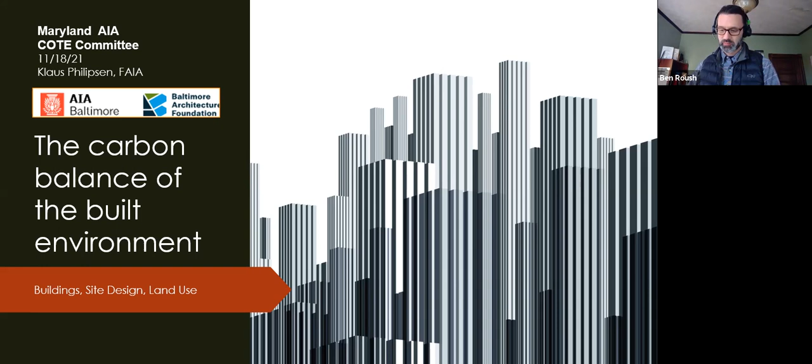Good morning. Congratulations on starting your day with decarbonizing the built environment. It's the topic that's always on your mind right after breakfast, I'm sure. Obviously we are motivated with the Glasgow conference and this being in the news every day. So if the COTE committee doesn't have their mind always on this, they sure do now.

As Ben said, this presentation is a modification of what I presented to the Maryland Climate Commission, which was a fairly ballsy thing that I took the invitation from them to present to, because that's a really high caliber group of experts, and I'm not. So anyway, you will see what I told them.

As you know, the discussion about sustainable built environment has been slightly moving from just a focus on energy to a broader lens about the carbon footprint. This shift in focus is what I try to tell the Commission about.

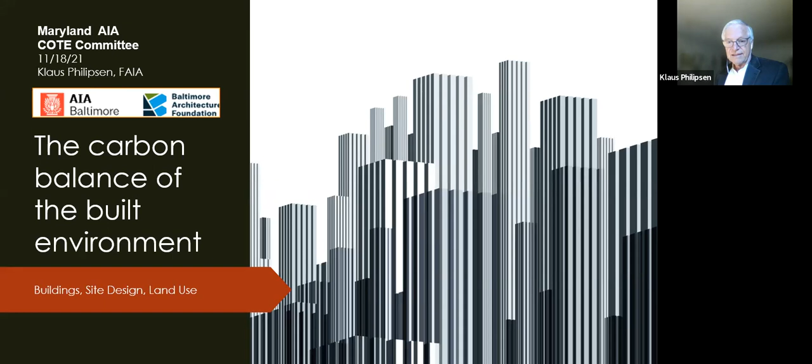So we are now talking also about embodied carbon in materials, all the way from production to recycling of the building at the end of life. We talk about non-fossil fuels in the context of energy efficiency not being so much an issue anymore if you had really renewable fuels. And land use and site design, which are always two aspects that are dear to my heart, but they are not necessarily on everybody's radar when we are talking about sustainability.

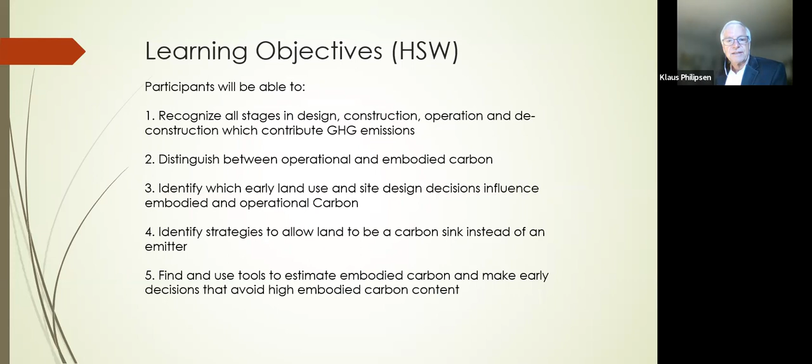So the learning objectives are these. I don't need to read them out, but we will talk about operational and embodied carbon and that distinction that I just mentioned already.

And myself, I am not an expert or specialist in sustainability necessarily, but I have always made sustainability the center of my activities. So this more holistic sustainability perspective, in the 46 years—and Ben alluded to the long duration of my practice—46 years intersecting buildings, urban design, and planning. And that has also led me to a lot of work in the nonprofit sector and in civic engagement.

And so in the holistic view of sustainability, all these things intersect. And I always thought that the best building isn't worth much if it isn't responsive to the context. And in sustainability, we talk more and more about systems, and buildings are part of systems.

And applied to decarbonization, this means the greenest building doesn't count for much if it was created by ransacking the land around it, or if it doesn't have equitable access, or was created with a huge carbon footprint in the construction, or it is so expensive that it can't scale.

That would be sort of like an all-electric Porsche, or this morning in the paper, there is Biden in an all-electric Hummer that has 650 horsepower and a sticker price of $160,000. Its contribution to carbon reduction wouldn't be good because too much energy was spent to build it, too much embodied carbon in it, and it's too expensive to scale.

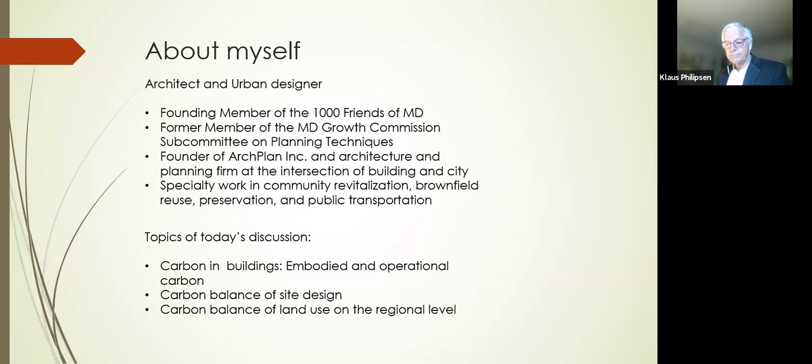As I said, the COP conference put this all into perspective again last week, or the last two weeks, and those of you who followed it could see that the urgency is beyond doubt, but the implementation and the activities, that is the rub.

Let's just, I'd like to talk about community. My blogs are called Community Architects.

So there was a calculation done by ICLEI to calculate what regional local governments would have to do to make their communities so carbon reduced that they would meet the 1.5 degrees Celsius target. By 2030, which is in 9 years, the average community globally needs to reduce emissions by 63%. So on the community level, that's the all-encompassing part of buildings, sites, and land use.

And as you all know, buildings are responsible for 40% of greenhouse gas emissions. They are also 14% of water consumption. And as I read it, 60% of the global waste. That is just a stunning number.

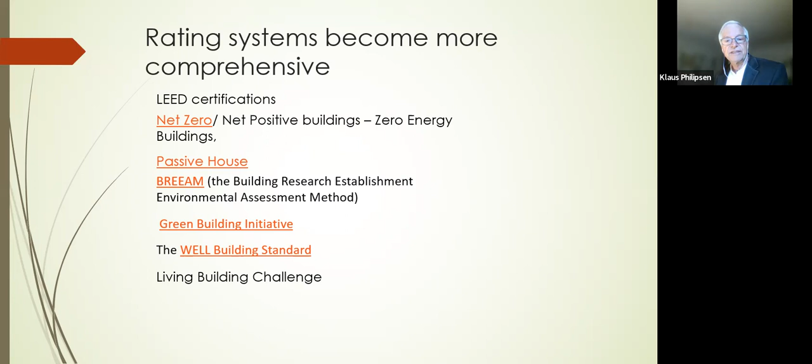Today, the emphasis is on that, which is what I told the Climate Commission, because they had not really done that to date, and their policy recommendations to the state and the legislative period next year are all about operational carbon. So I thought it would be good to speak about embodied carbon as well, because that needs to be also a policy in the state of Maryland.

And so once again, in operation, energy and carbon is kind of a proxy, as long as energy is not renewable. But once you would have all renewable energy, you could kind of relinquish a little bit on the frugality of energy, because then it wouldn't matter as much. If everything is solar, then it wouldn't matter as much whether you're that frugal with the energy.

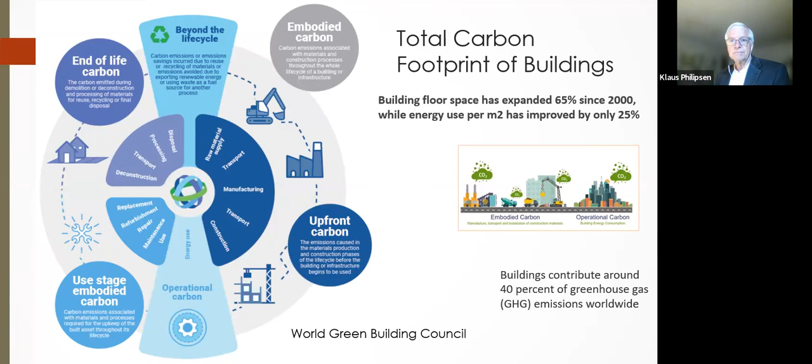But no, what is going on? Get this moving again.

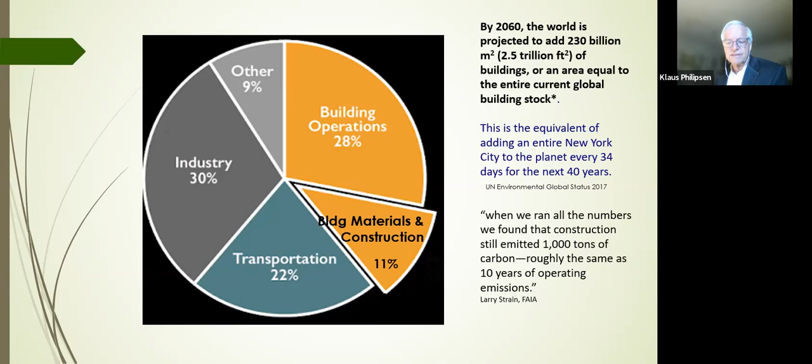The relationship between operations and embodied carbon starts to shift if you put into perspective how much gets built. There's an estimate that in the next 40 years, the footprint of all buildings in the world will double. That is just a staggering thing.

The more that accelerates, that we build so much—not necessarily all in the United States, it's in China and India, wherever—then you get a completely different relationship between embodied carbon and operational carbon. You see that the embodied carbon relationship could be almost equal to that of operational carbon.

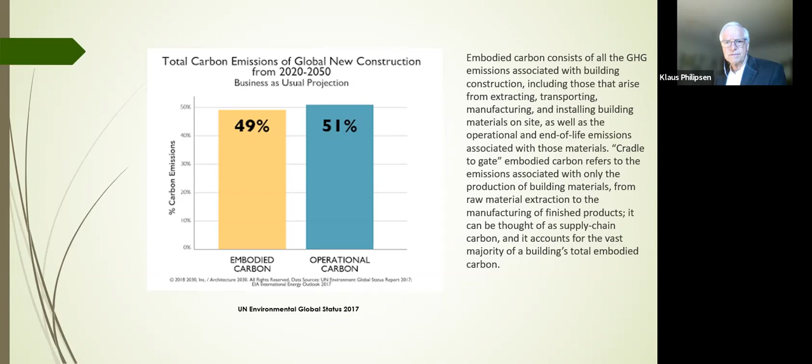There are, of course, a lot of variables in that. One of them is how energy efficient the buildings themselves are. And then one can look at various graphs in a lot of ways.

So here, the embodied carbon chart on the right shows the chief culprits in terms of materials. Three materials—concrete, steel, and aluminum—cause 23% of the carbon emissions. That's the red segment there in the pie chart.

The left chart looks at it in another way, showing building components. The right one is about materials, and the left one is about building components. Core and shell make up about 11% of that CO2, and industry and making the other stuff is 32%.

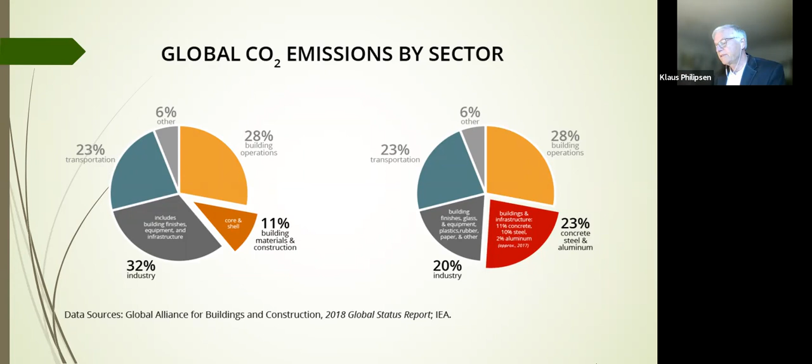So then the buzzword is the life cycle assessment, LCA, which goes from the material extraction all the way to the use and the construction, the use, and then the end of life when things get demolished again or, in other ways, reused, hopefully.

Architects, of course, control only a portion of these steps, namely which materials they select. But also sometimes some of us get involved in land use planning, and some—many of us—in site design. So we'll talk about those two items in the full life cycle assessment that happen before the building gets built.

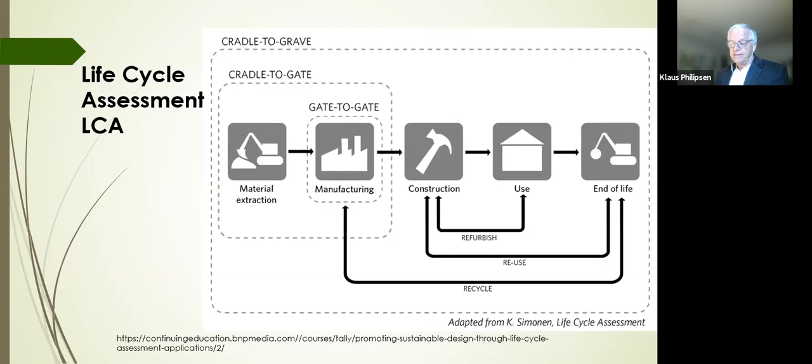So, land use. Land is the scarcest resource on earth. This makes land development one of the fundamental components in effective, sustainable building practice.

Site design is usually managed by the owner, developer, or contractor, while land use overall is regulated by the local jurisdiction. So depending on with whom we interact and who our client is, we will either deal with just site design or with land use in a broader sense. But the carbon reduction principles would stand in both cases.

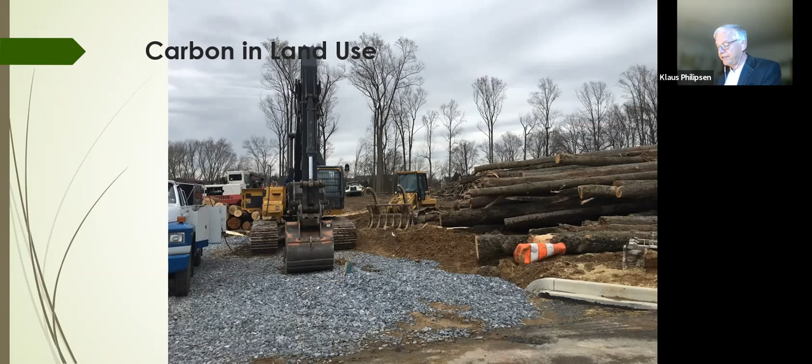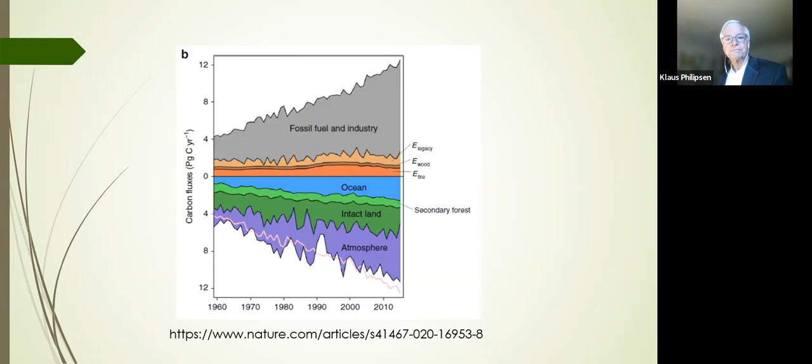But we're talking about the green portion here, which is the land part. The land part is gauged every year for what the land absorption effectiveness is. And then, of course, land is also an emitter. So we have this dual function, that land is an emitter and a sequester of carbon. In the natural state, it is sequestering carbon, and in the man-made state, it could be an emitter.

The cumulative effect of the balance of these is really an emerging science. Just in Glasgow, the forest discussion tried to see what forests do and whether they reduce or increase by country. The United States actually improved their forest cover, and the numbers for the US were changed in the last minute.

So it just shows that this is not so easy to get answers on. But we know that in spite of widespread smart growth policies, the US is very bad at land use, using a lot more land for development than Europe. I'd say land use, not living standard, is the major driver for the fact that US carbon footprint per person is about twice that of European countries.

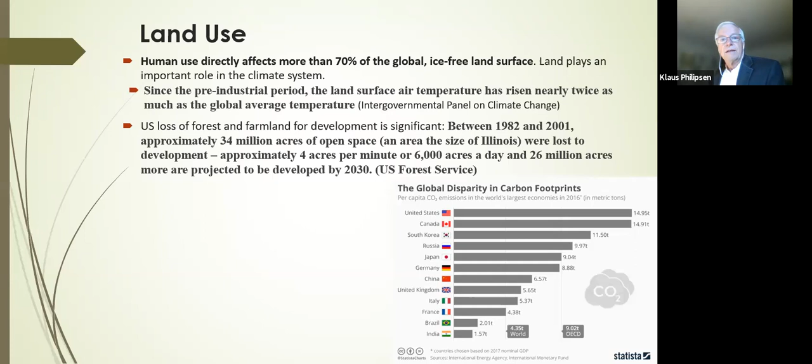The US, not surprisingly, has a very high share of managed land. The absorption rate of land in general is 12.3% of the total greenhouse gas emissions in 2019. That sounds like not the wildest, largest bit, but it's 12.3% that's absorbed by land. And the emissions that come from land are really a small piece - 0.4% of all greenhouse gas emissions.

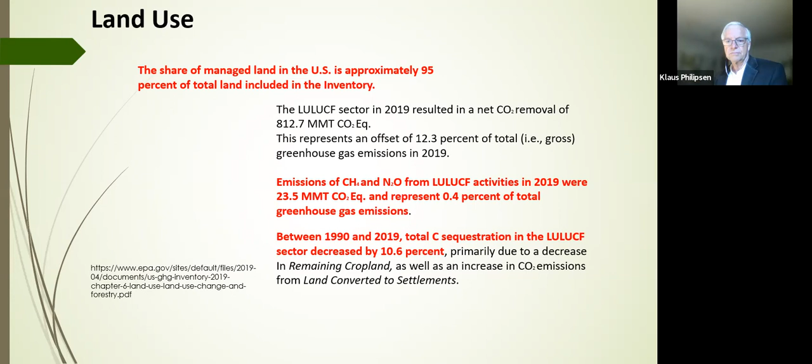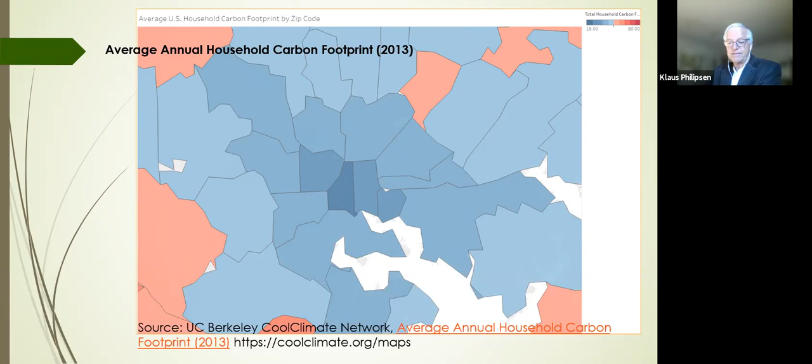So suburbanization undermines the greenhouse gas benefits of urban population density. And one may wonder why that is, because that sounds counterintuitive to many people that aren't really deep in the woods with that. So here is a graph that shows a little bit of how that works.

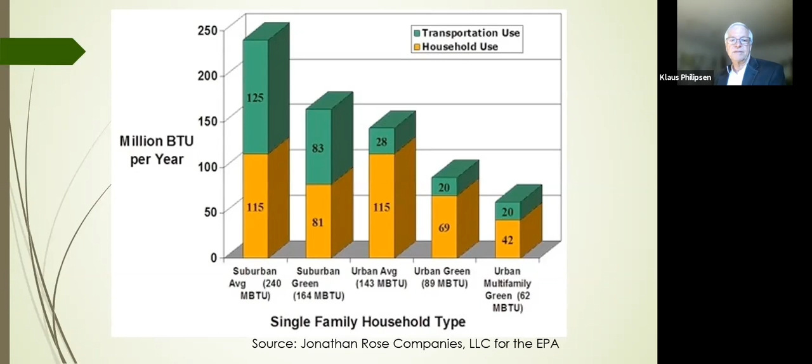So the upshot of this is promote density. A possible policy I would highly recommend is no net loss of open space. That should be a Maryland policy, that we are not going any further out into the landscape, and really recognize that this is a non-renewable resource, land is.

And then include the carbon balance into the sustainability and sustainable community palette. As you know, the state has TOD and main streets and land and historic preservation and so on as part of a sustainable community tax credit palette. The carbon balance could be introduced into that palette and would be an additional reason to get tax credits.

And we could also make local property tax rates based on carbon footprint, or have a carbon footprint component in there. So there are a number of ways land use could have direct policy implications, and that would be interesting for you all as the code committee to discuss and see how that could be translated into Maryland legislation.

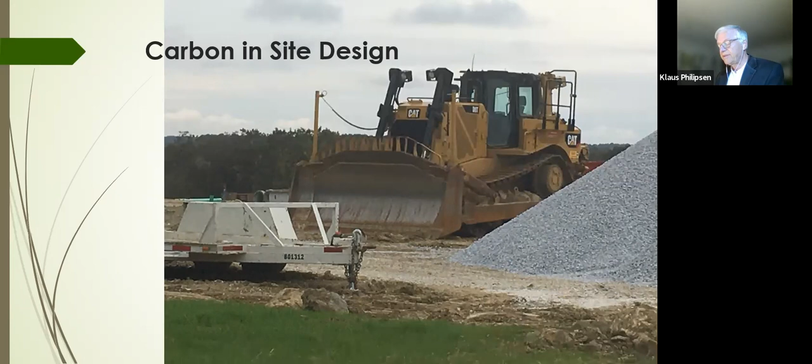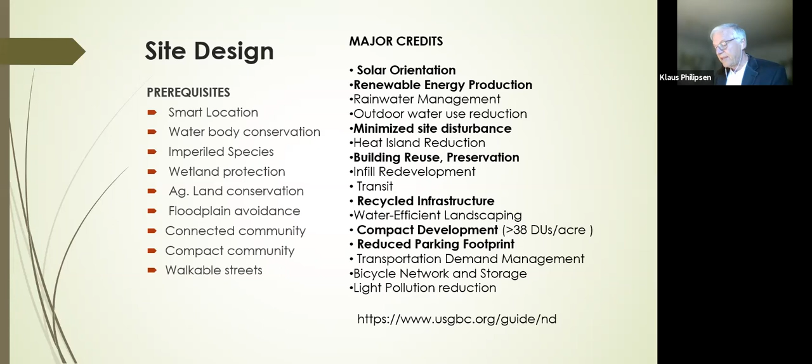Hopefully, as it is with LEED altogether, eventually LEED wouldn't be necessary anymore as an incentive program, and you would have regulations that would require all of these things. So that again is a policy question.

So a carbon neutral site design would be a bit like, especially for greenfield development, the stormwater management regulations, where the stormwater has to be managed in the way that you are thinking of your site as a forested site, and the stormwater behavior it would have as a forested site would have to be maintained after development through various stormwater mitigation strategies. And the same could be done with carbon.

Mitigation strategies for carbon could include, if you have large roof areas or parking lots, using solar installations to get green energy produced on site—that's a carbon mitigation strategy. The heat island effect could be calculated the same way, so that the site does not make a negative contribution, that at the very least it would be neutral.

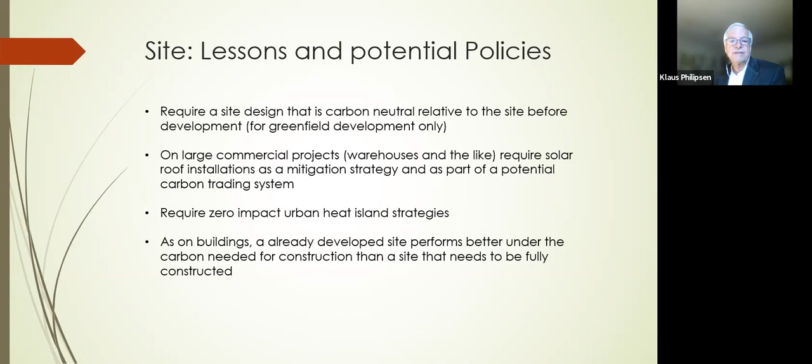These are all aspects I don't think are part of the mainstream discussion right now. So this would be kind of a cutting edge discussion to have in the state of Maryland, to introduce those kinds of metrics.

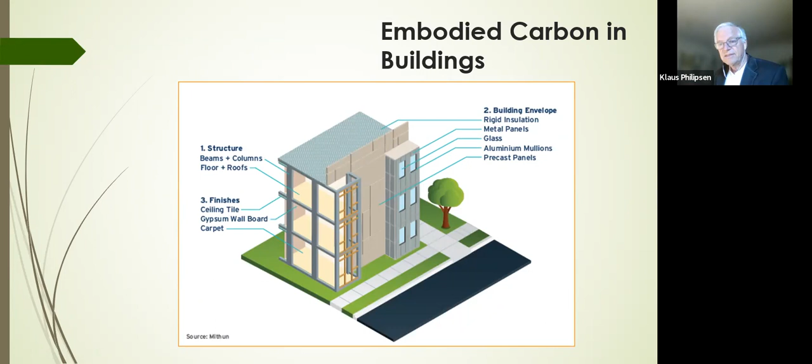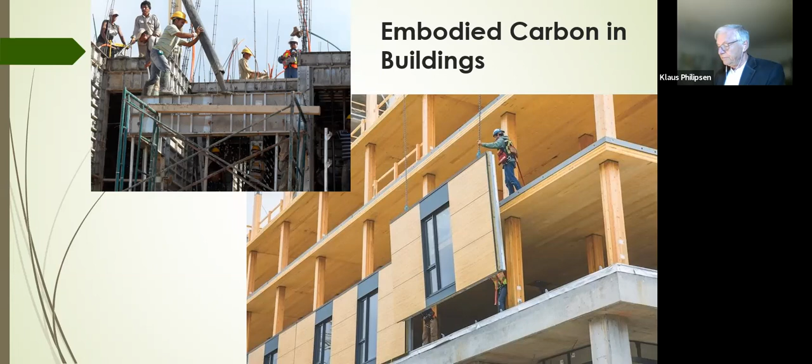We all know there are a lot of carbon emissions when you use concrete. I mentioned that concrete was one of the three materials at the top of the list with high carbon emissions. So replacing concrete with either lower emission concrete or with other materials is always sort of the low-hanging fruit when the building type allows that substitution. Concrete, steel, and aluminum are all three the chief culprits in materials.

We also know that core and shell are the major building components. We can look endlessly at the differences between various floor materials, but if we have not really looked at core and shell properly in the beginning, it's very hard to make this up with finishes in the end, is what I'm saying. You're probably all familiar with that line of thinking.

But that line of thinking is not an easy one for the architect, because the architect often has full control over what the finishes are, but not full control over what the core and shell materials are, because of course there's the structural engineer and the mechanical engineers and all kinds of other folks involved.

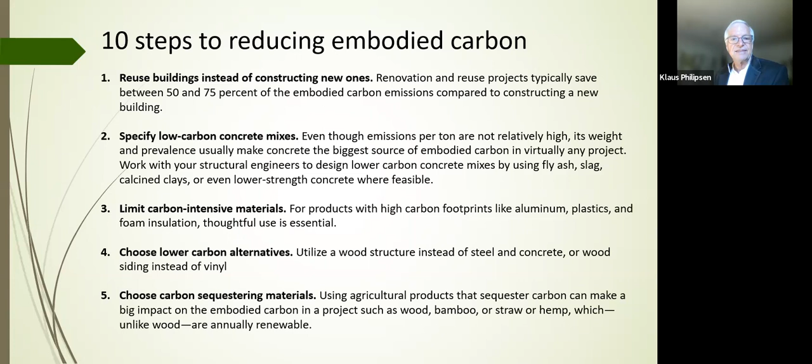Reused materials are also way underutilized because of our massive centralization and industrialization and how the supply chain works. But there are all kinds of more boutique-y ways that are proof of concept for how you can reuse material, and it would always be good for cutting-edge architects to use these more boutique-y solutions to show it can be done, and then ultimately it will scale. So, reuse materials directly, or at least use materials that have recycled content.

Structural efficiency is key. We all have dealings with structural engineers who do things the way they've always done them, with a huge amount of extra safety just out of laziness. Most of us hated the structural part of our architecture certification, but the more we understand about structures ourselves, the better. We need to understand mechanical and structural systems to be a good influencer in carbon reduction.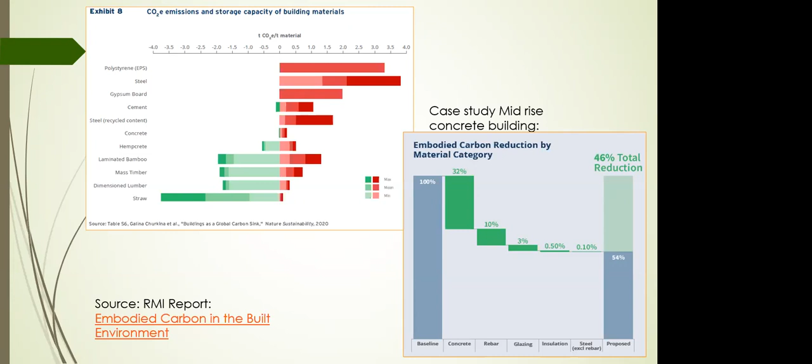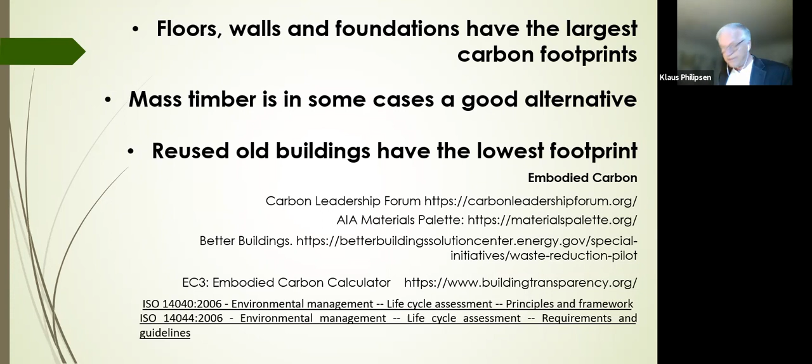So I'm getting to the end here. The take-home messages are just a repetition of what I said already: floors, walls, and foundations have the largest carbon footprints. Mass timber is in some cases the good alternative. Reuse of old buildings has the lowest footprint. Those are the important things to remember when we're trying to reduce carbon, not just energy.

On policies for waste reduction: require manufacturers to take their products back after the life cycle. That's an issue all around - it's been discussed for decades with computers and companies like Dell, but it's also important for buildings and car batteries. The Europeans are much further along, requiring pharmacies to take medications back and appliance manufacturers to take appliances back. In our country, they too often wind up in the landfill.

A carbon tax is an important policy. We have this Northeast alliance of states between Maine and Virginia working toward a carbon tax - we have RGGI for power plants, but we need a carbon tax for transportation, and then for everything else too. This is a state-by-state issue but also a national one, and it was also a big topic in Glasgow.